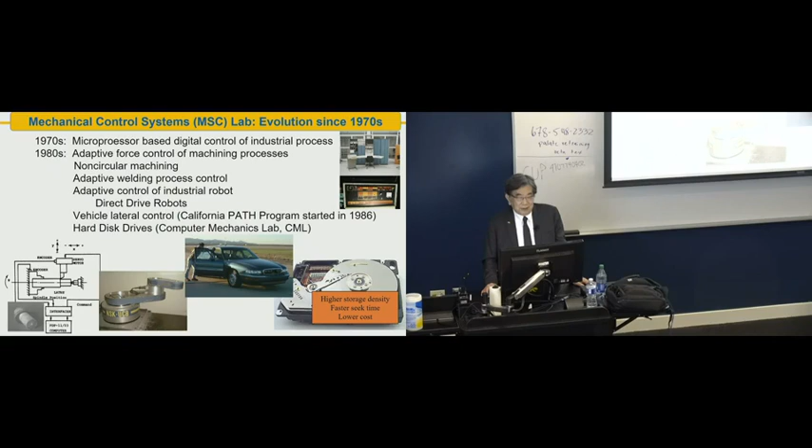And maybe it's nice to talk about what happened. This is my lab in the 1970s. We had some old minicomputers, and at the beginning I had a robot and a hard disk drive. Also in the 1980s, California was interested in automated highway systems. So I joined that group, taking care of so-called vehicle lateral control. So that's how I got involved in vehicle control.

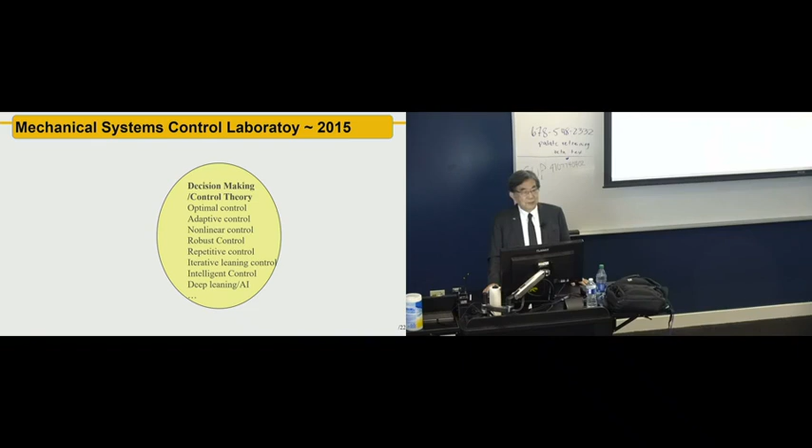Then by 2015, my home ground is always control methodology. Having control methodology in the center, I realize my lab is surrounded by all kinds of hardware, having all kinds of fun with students: machining, machine tools, robots, steering systems, and so forth. And so this is my lab now. I still have close to around 20 PhD students, half of them looking into intelligent industrial robots, and the other half looking into autonomous vehicles.

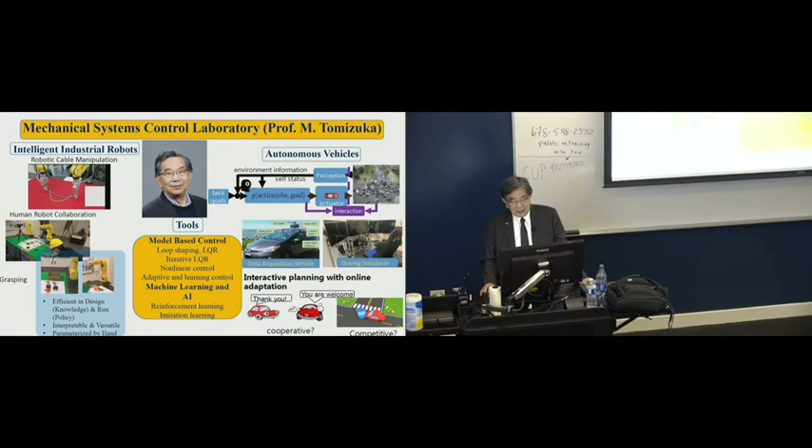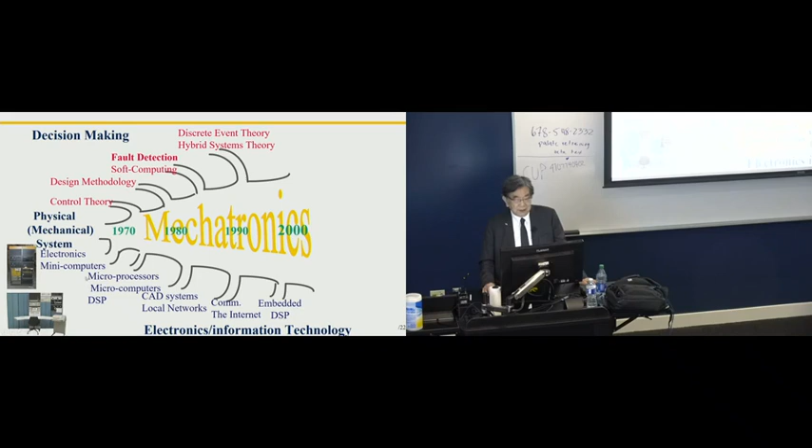As tools, we have all kinds of control methodology, but recently machine learning and AI have become a very important part. So I might call this a control-oriented mechatronics group. On the top we have the methodology part, decision-making, then electronics and information technology, and then physical systems. And now typically we deal with this kind of hardware. And this is the time axis: 1970, 1980, 1990.

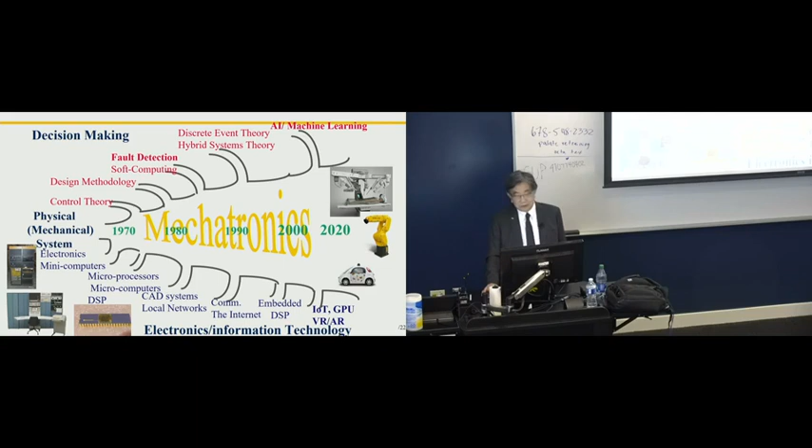But the most recent addition to the decision-making toolbox is AI and machine learning. And on the information technology side, all kinds of things: IoT, GPU computers, DPU, VR, AR, we are utilizing. So now we are there, and we have two pillars. One is intelligent industrial robots, and I will introduce some of them today. Human-robot collaboration is one interesting subject we have been doing for at least the last 5 years.

And then classic robot problems, but looked at from a newer methodology point of view. Impedance control, multi-agent interaction: it's not necessarily a new problem, but we can apply those techniques to new environments. Autonomous driving is an area where we can integrate model-based control and machine learning. So something called zero-shot deep reinforcement learning.

This is how you can make simulation-to-real gap filling. You train some reinforcement learning strategy by simulation, but when you apply it, the situation may not be exactly the same as in the training environment. So we would like to have the gap nicely overcome. So that's zero-shot, essentially, implementation.

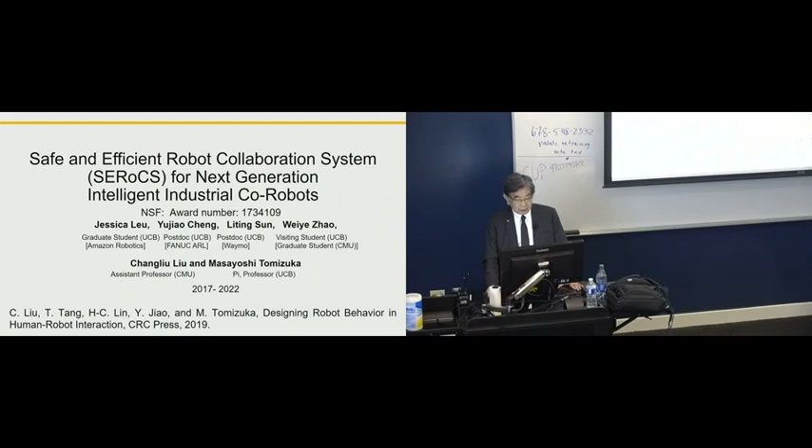The first project is safe and efficient robot collaboration systems for next generation intelligent industrial co-robots. This project was sponsored by NSF, and many people graduated. One key person was Changliu Liu. She is now an assistant professor at CMU. Some of the things we have done in this project are in the book we published, Designing Robot Behavior in Human-Robot Interaction.

And for human-robot collaboration there are lots of reasons. Manufacturing moved from mass production to flexible automation. Instead of producing the same kind of product, we produce many kinds of product. So flexibility is really important. Intelligence is important. So there are lots of opportunities for control and AI people to do something interesting. One of them is the co-robot, how you can make robot and human collaborate. Robots used to be just for mass production, but as we move to flexible automation, we would like to see more interaction of human and robot jointly accomplishing tasks.

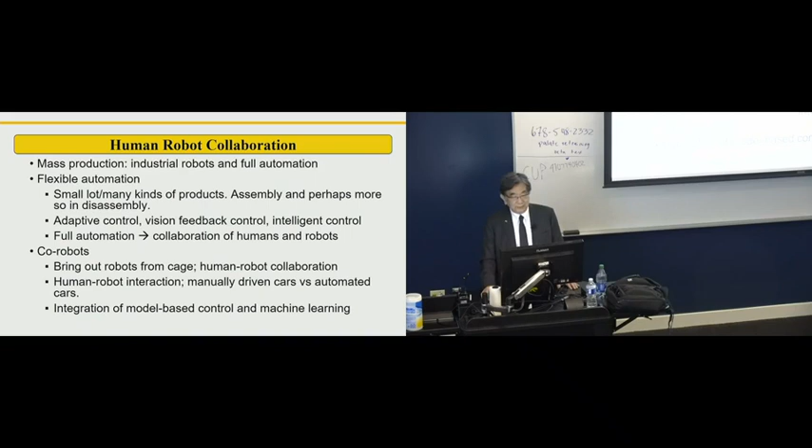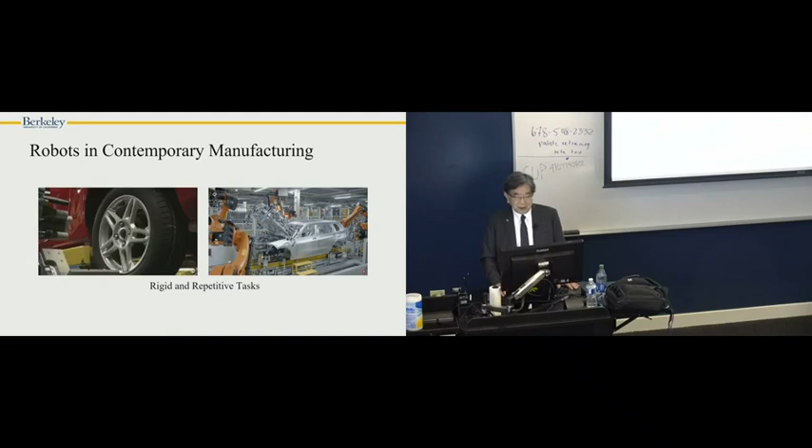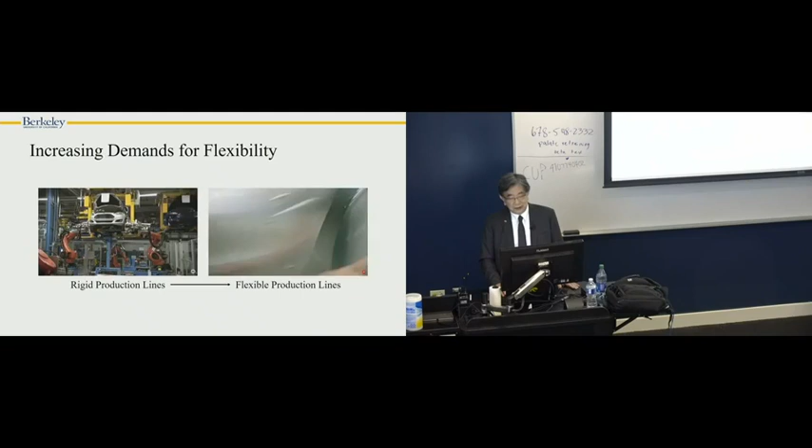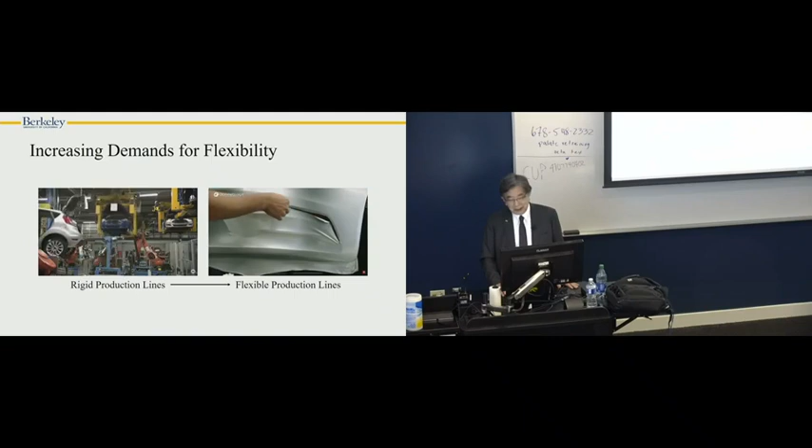So this is the more traditional way of utilizing robots, for rigid and repetitive tasks. It's for mass production. But in a flexible production line, for each car, you might need to put on a different tire. There, a human can do a very great job. The human is still the most intelligent and versatile machine. But humans can easily get tired. Robots can work 24/7, so we can take advantage of those aspects.

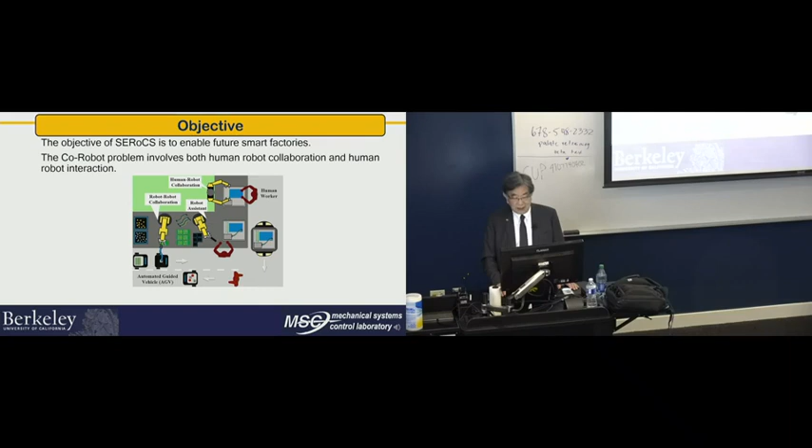So one way to envision the future factory is there are all kinds of human and robot interactions. In some parts they are working at the same station, but in other parts, human and robot are making one line and doing different things. So both human and robot work together. In designing nice human-robot systems, we would like to emphasize both efficiency and safety. Having a robot very close to people, we have to be very careful. And in achieving the design objective of production efficiency while doing lots of things in real time, we need to make sure that computation does not become a barrier.

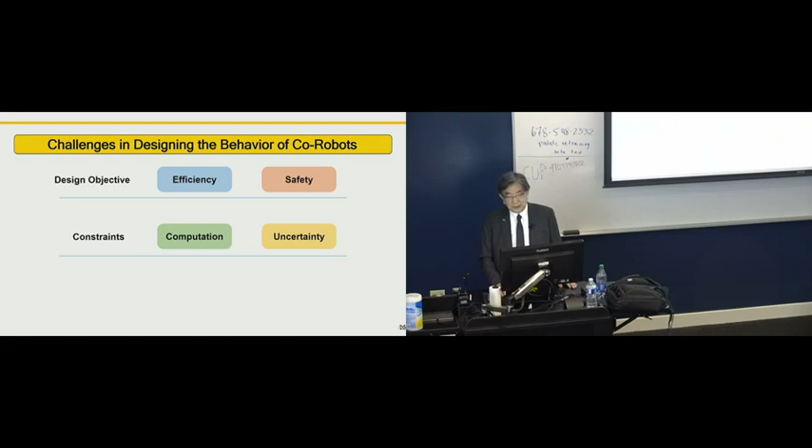And humans have lots of uncertainties. The robot has to be careful. If a human makes some motion which the robot didn't think about, that has to be quickly recognized and taken care of. So the question is how to design the behavior of a co-robot in a dynamic uncertain environment, with varying human dynamics and limited computational capacity. So that was the challenge.

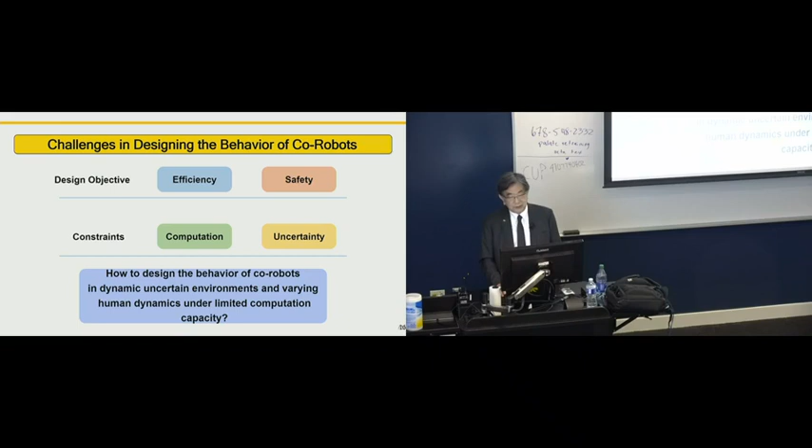To answer that question, one system that we introduced was so-called SEROCS, Safe and Efficient Robot Collaboration Systems. It essentially has 3 modules. One module is environmental monitoring. A big part of environmental monitoring is watching what the human may be doing. You might call this a social perception module. And once you have perception, how the other one will be making further motion, you have to predict. Prediction has to come.

Once prediction has come, first it has to be transferred to planning. What kind of plan should be made? To make good planning, we need a task module which is dedicated to task planning. In here we have a motion skill library and we do online task planning. Just in assembly, what kind of sequence we should follow is a good question. Once we figure that out, we do real-time operation: safe and efficient motion planning and control. And of course, this box is a place where people like myself, trained in control, can do some interesting job.

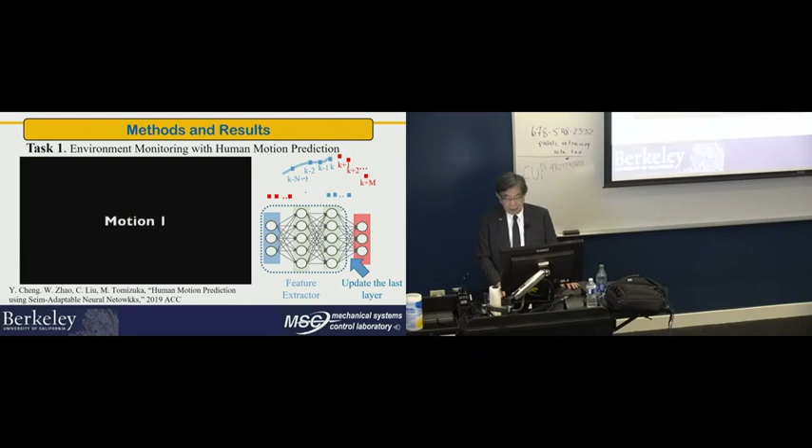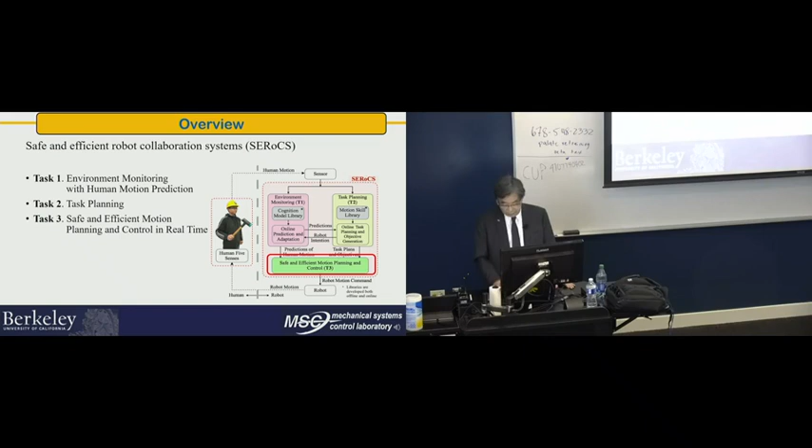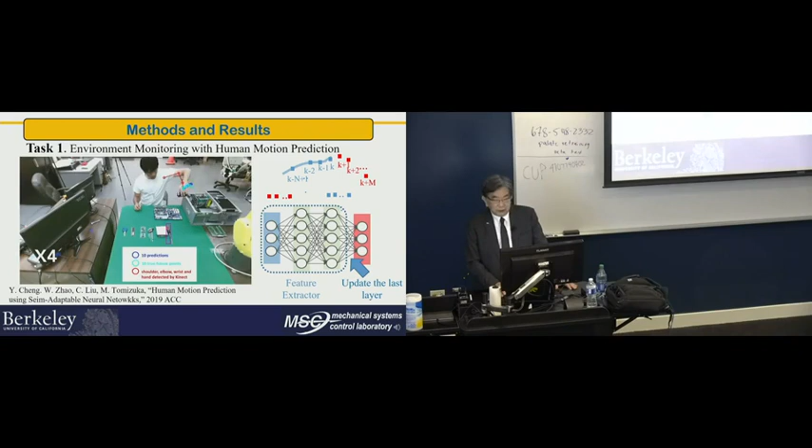That will result in the robot actually moving around, and the moving robot will be interacting with the human, and then make a feedback loop. Sensors again measure what the human is doing. So this is human motion prediction, perception and prediction. What is shown here is we are essentially making a history of the last N points, and based on that, predicting what kind of motion the human will follow.

Essentially, we made a neural network, and in some part of the neural network, we introduced an adaptive feature. The adaptive feature is for different humans. We do training for one subject, one worker, but a different worker may be coming. In that case, some adjustment of the network output will be useful. So this is task 1, environmental monitoring with human motion prediction.

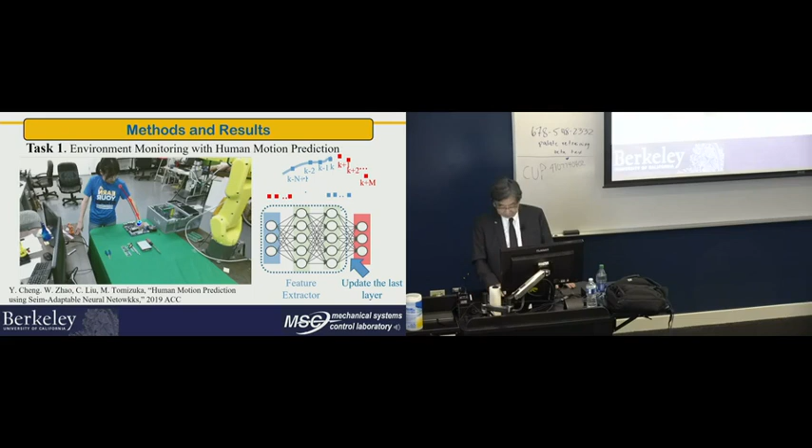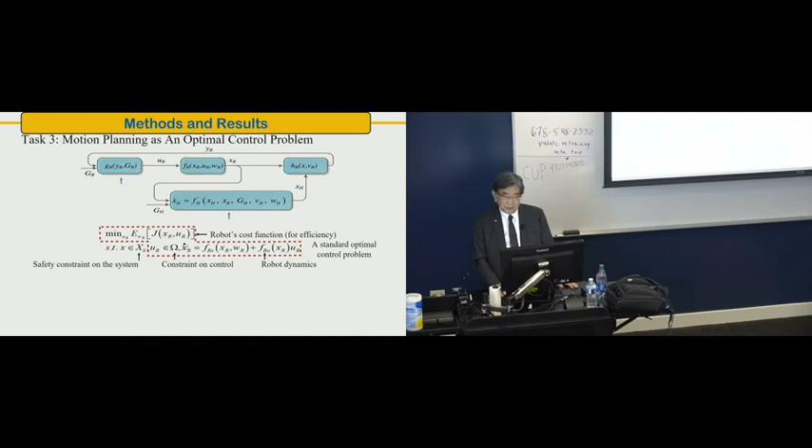And among those constraints, the most difficult one is the safety constraint on the system, because the human has got lots of uncertain aspects from the robot point of view. So if we just look at this dotted line portion, excluding the human, then the problem becomes a standard optimal control problem. So what we said was, okay, let's solve this part, the red part, utilizing some standard programming approach. But just applying the standard method didn't quite work, because the constraints include lots of non-convex optimization area, obstacles at many places.

So once we have this kind of feasible set algorithm figure out what is the optimal path, when the robot is actually moving, the robot has to make sure that safety is assured with dynamic objects. So in this case, this figure explains human and robot. The human is a sort of dynamic object, a dynamic obstacle, and we are doing robot control. And if, relatively speaking, human and robot stay in the blue area, we know that it's safe. Collision will not take place.

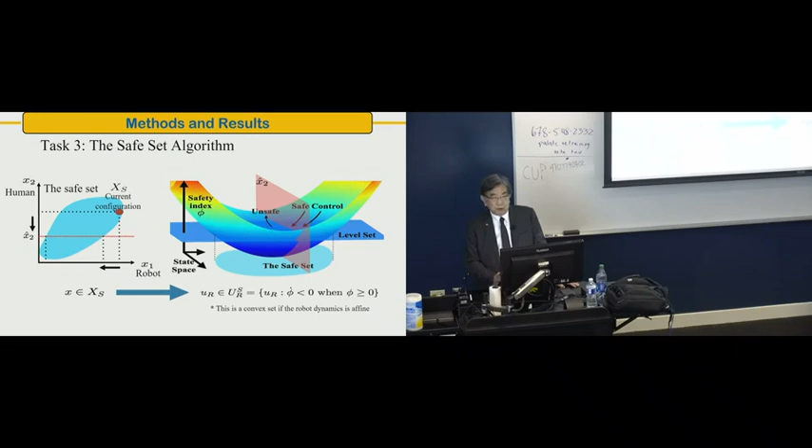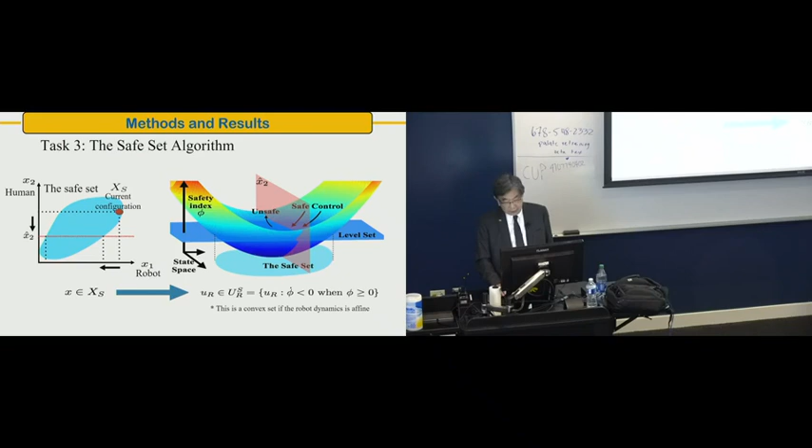So from measurement, if we regard that the safety index is positive, we would like to make sure that we define u such that phi dot becomes negative. So it will push back to the safe region. So this was called the safe set. This was also devised by Changliu, and it's the safe set algorithm. So the idea is that the convex feasible set algorithm will figure out what will be the optimum u, the best u. And then when safety is considered, we add a safety controller.

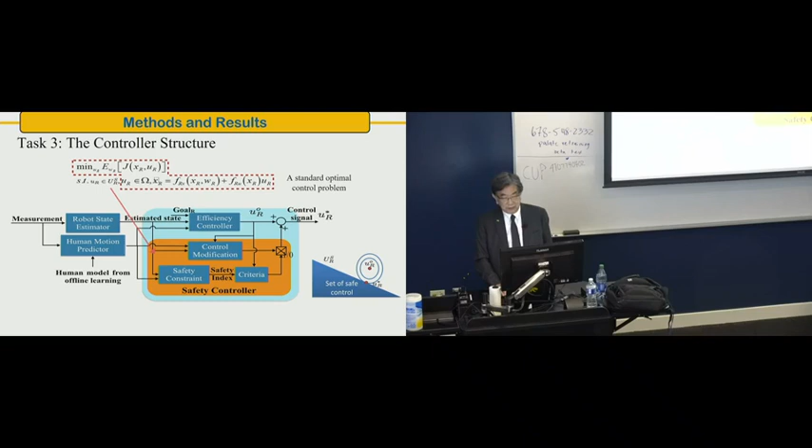And the idea of the safety controller is, if u is outside in the unsafe area, we try to pick the safe control from the safe set which is closest to the optimum UR. And in that way, we can achieve very safe maneuvers.

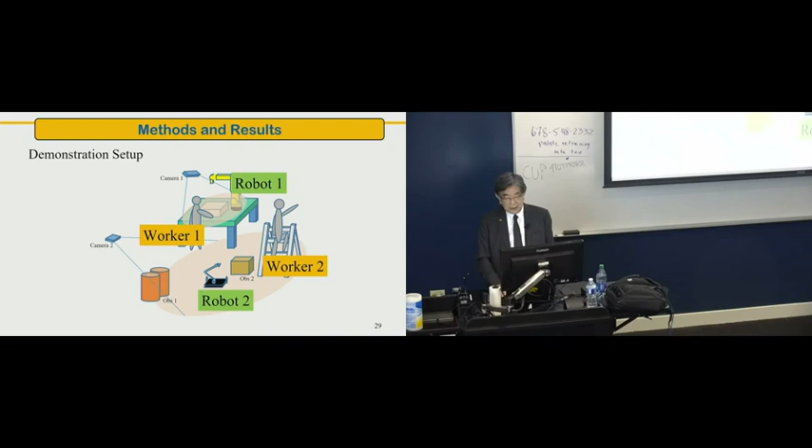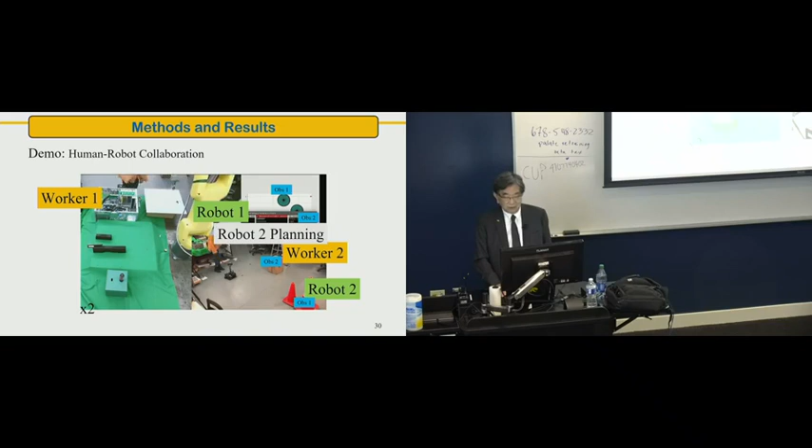We demonstrated all the ideas by making a simple setup. So this was the last part of the NSF project. We had 2 workers and 2 robots; at station 1 the robot and worker are assembling something collaboratively, and robot 2 is carrying one piece of an object from one worker to another without collision. So this was the last part of the NSF project.

Now, along this line, Changliu, after moving to CMU, continues. So this is conditional behavior prediction, what she is doing. And the idea here is when the robot does things, it observes what the human may be doing and decides its motion. But the truth is, if the robot does something, the human will react. So take that kind of reaction into account, account for the influence on the human, and make sure that everything is safe. She has a paper at ICRA this year. ICRA is, I think, in May in Yokohama. So she will be presenting this work.

In terms of flexible automation, many kinds of small amounts of product.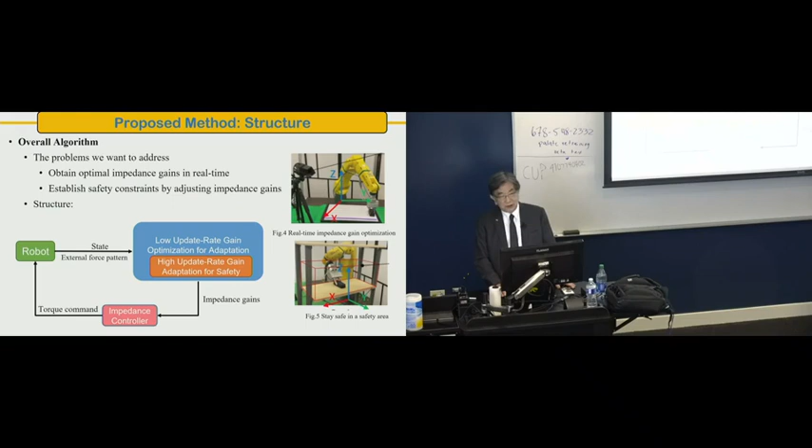So the problem they wanted to address is: obtain the optimal impedance gain in real time and establish a safety constraint. This is the kind of structure they came up with: a low update rate for optimization, and for safety, since an unsafe situation can arise at any time, the safety consideration has to be accomplished at a very high frequency—so a high update rate for gain adaptation for safety.

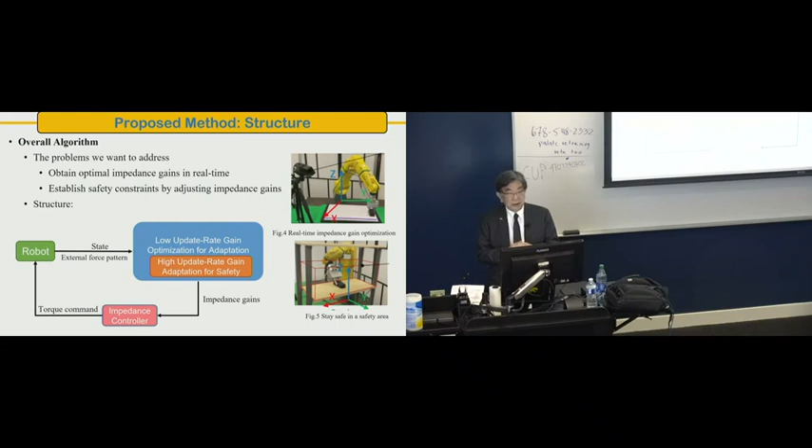By the way, this type of consideration is also common in autonomous driving. We have a layered approach: to deal with safety we have high frequency model predictive control, but for planning we have low frequency predictive control, and so forth. So the first step is to introduce a mathematical model for optimization of the gain, starting with the standard impedance control equation.

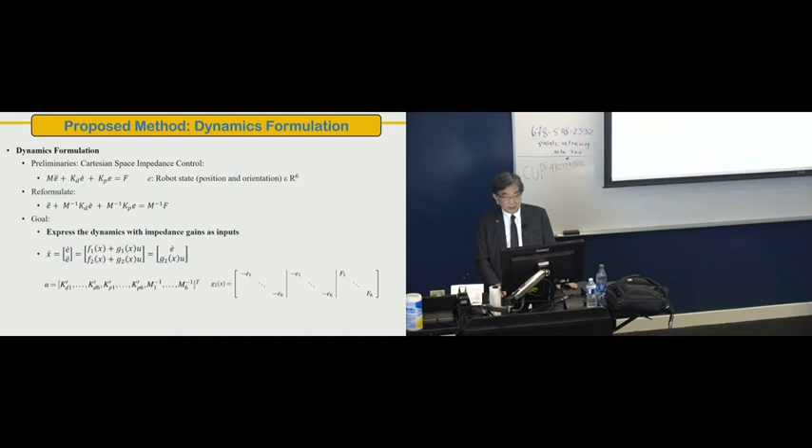The equation was rewritten. E-dot is still the state variable, but we put it as G2 times X times U, where U is the impedance gain, and G2 depends on the state. So instead of trying to keep the system linear, we put the equation in this form. The good thing is that U, the impedance gain, appears as part of the input vector, so it becomes more possible to do real-time optimization.

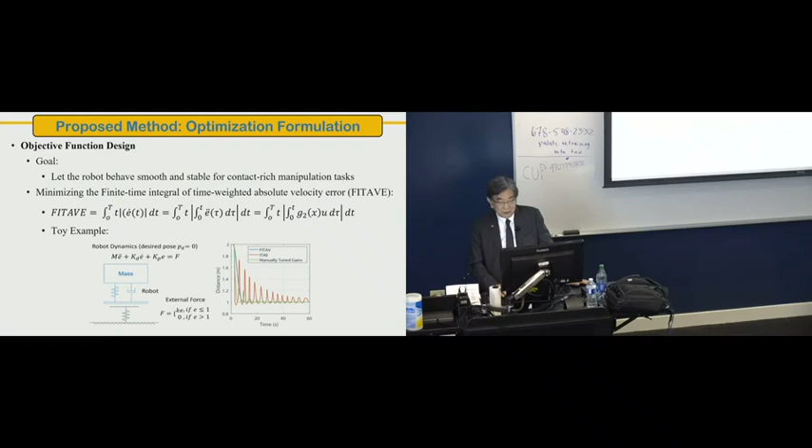To deal with the constraint, we use the so-called barrier function, a very popular approach for this type of problem. If h(x) is greater than 0, the first condition is satisfied—it's safe. But h(x) greater than 0 does not involve any control signal u, so we have to somehow introduce u. There's a theorem that makes h-dot(x) plus alpha times h greater than or equal to 0, ensuring h(x) stays greater than 0. If u shows up, you can make u satisfy this inequality constraint. If u still doesn't show up, you go through the same process again, and it results in a strategy to select u. We did this, and the performance looks good.

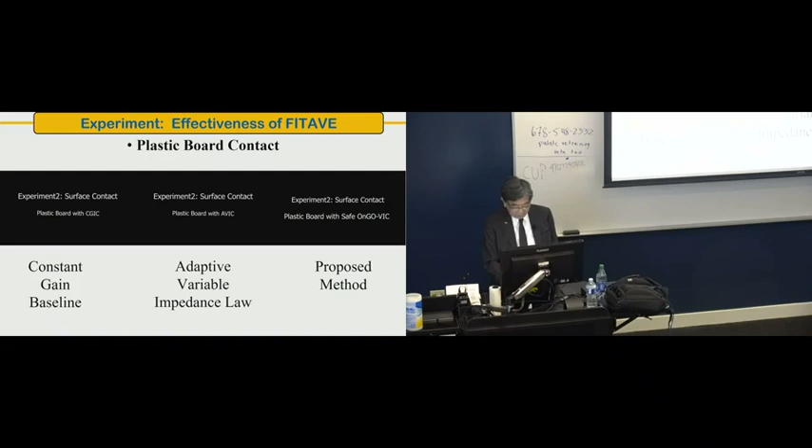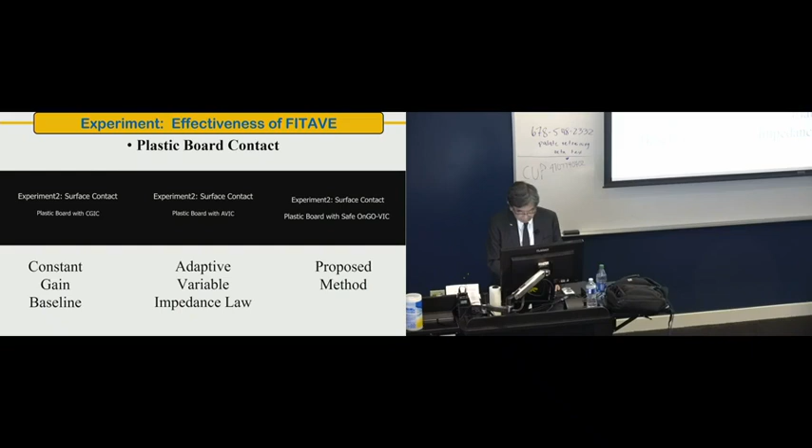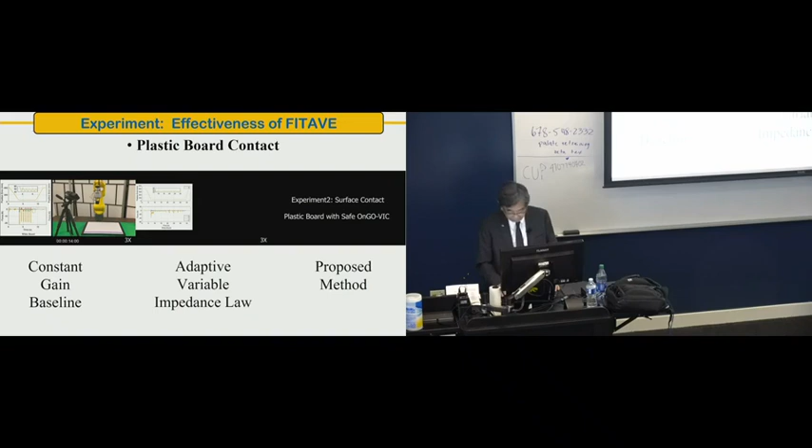Adaptive is good, but this method can make really nice and smooth transfer. I think I have to quickly move.

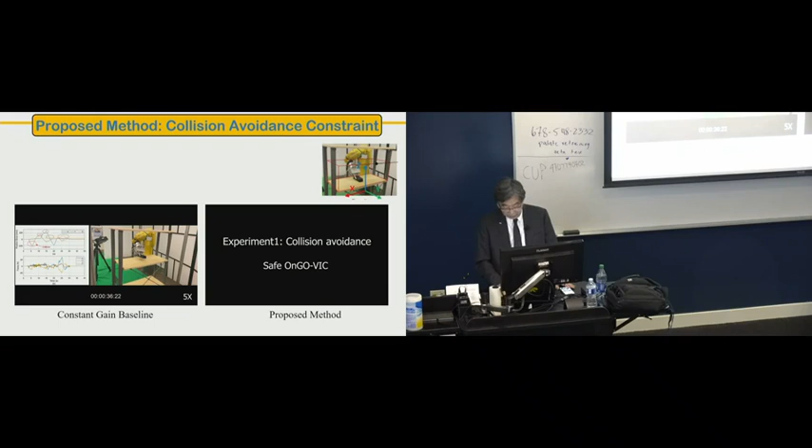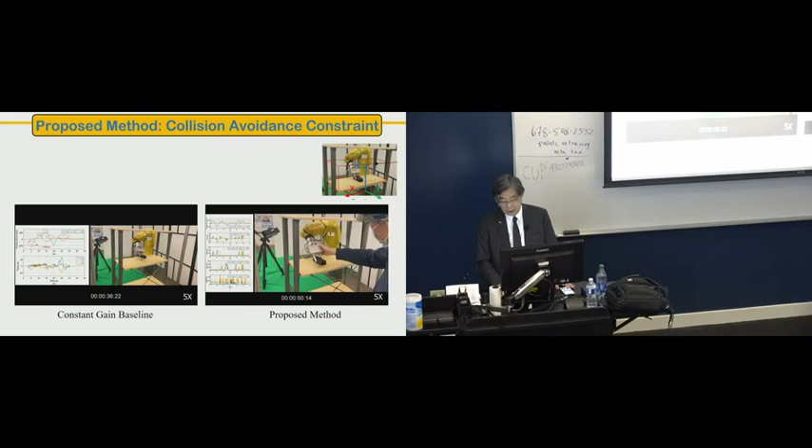Collision avoidance was also incorporated. Without collision avoidance, the robot can be easily pushed out of the boundary. But with the methods we just developed, as we come close to the edge, impedance is increased, so the robot resists that motion, the external force to go outside. So this was achieved.

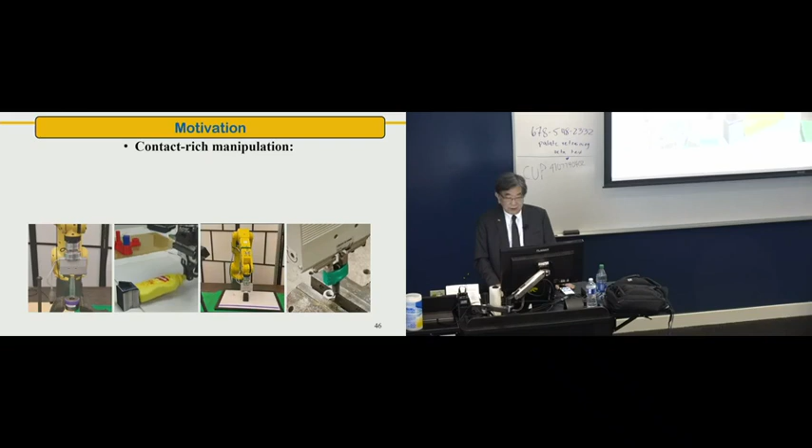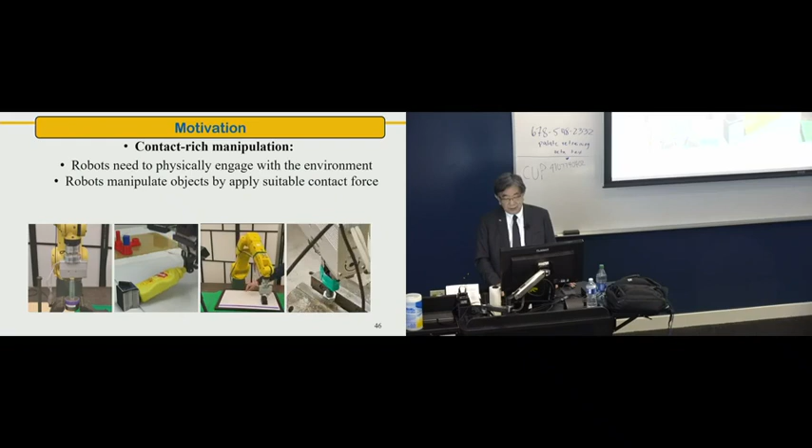Contact-rich manipulation is something the robot needs, physically engaging with the environment. The robot manipulates objects by applying suitable contact force. The traditional method is a human expert programming the robot. So here we wanted to do a learning-based approach.

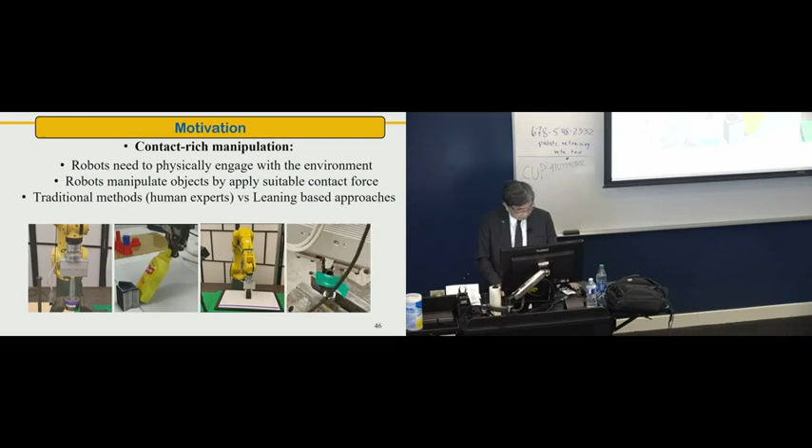To make a long story short, students succeeded in making a nice learning-based approach. It consists of an offline learning phase, where they do training by simulation-based learning. Then online, they further tune that policy based on sensor information.

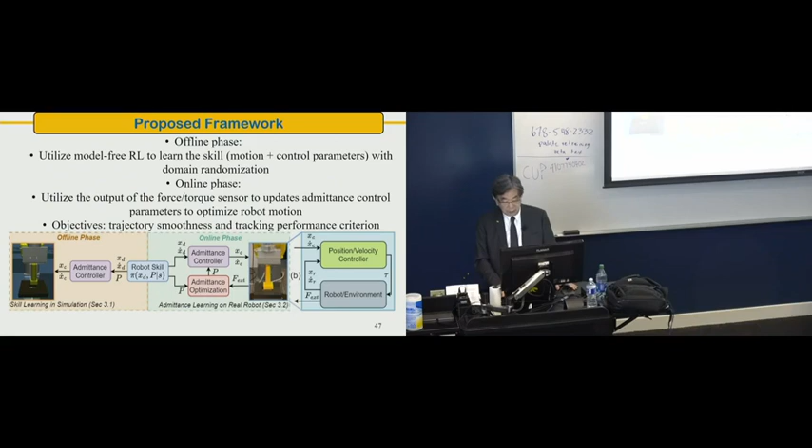And as a result, the proposed method, shown in the center, handles peg insertion. Of course, it does a good job for the trained scenario, but it also does a good job for some different tasks.

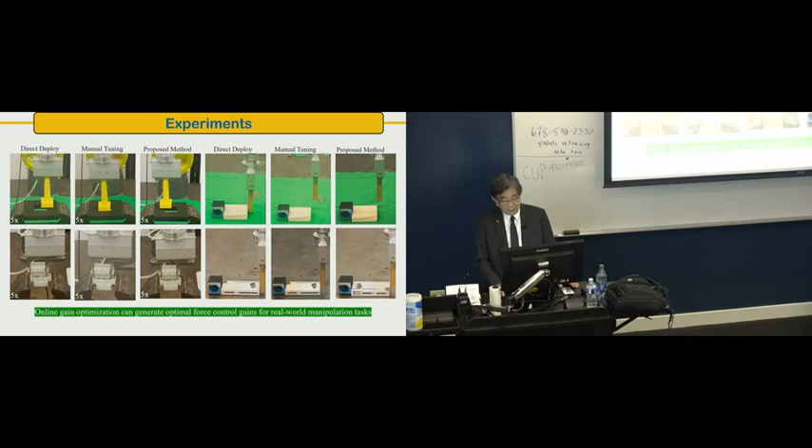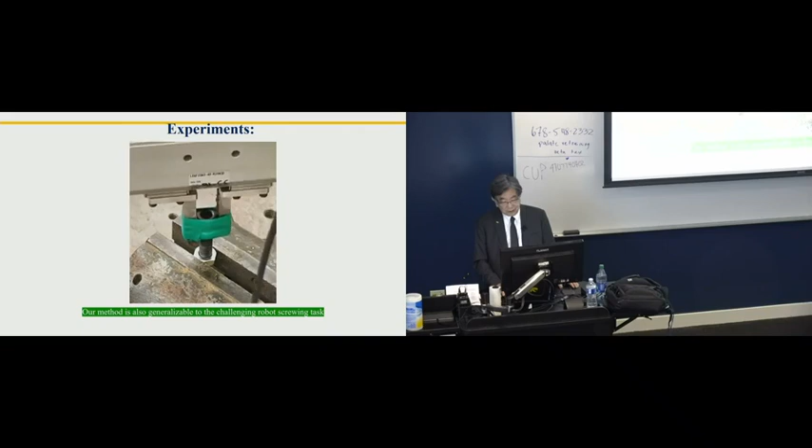Yes, and it even achieved something like handling a screwdriving situation.

Okay, I think I will skip this.

Multi-agent interaction generation with imagined potential games. This is how we may solve conflict resolution when two agents are coming close to each other instead of bumping. Someone has to yield, so that kind of collision will never take place.

This is a fairly new paper and it will be presented in June at ACC. If you are interested, go to the ACC proceedings and take a look.

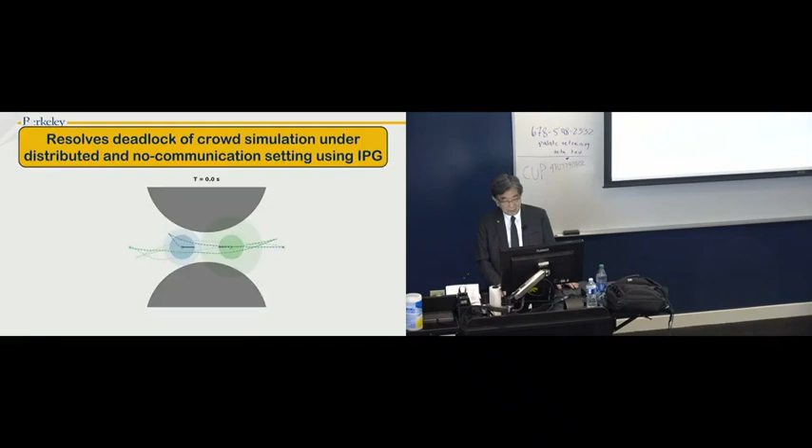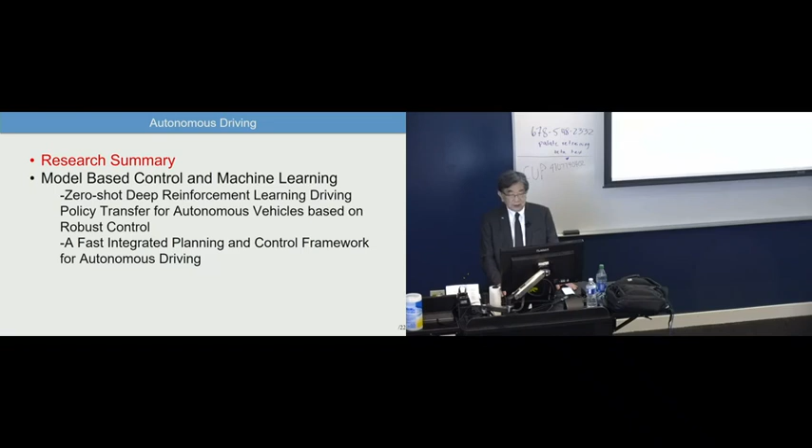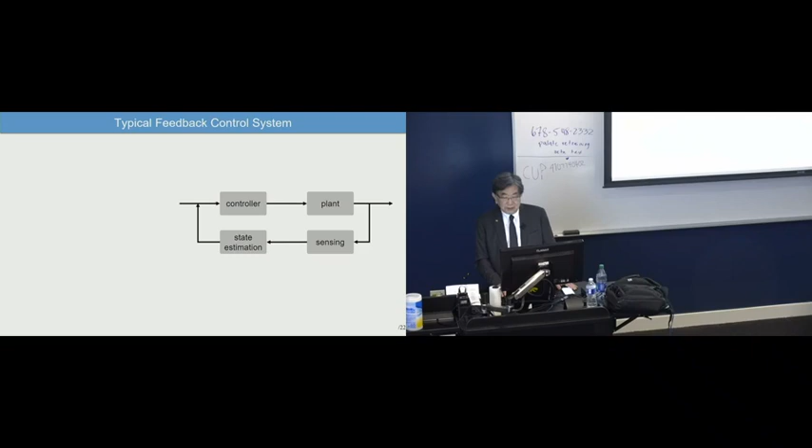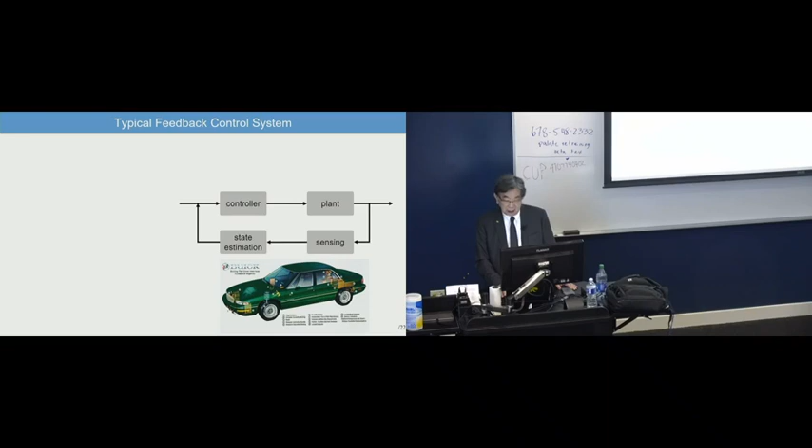Now, on the autonomous driving side, we have been doing model-based control and machine learning, their combination. For example, in this problem, something element involved around the vehicle, we would like to do some sensing, estimation, and control. This is a type of problem from when I was doing automated highway systems around 1990. Around that time we were doing this kind of research.

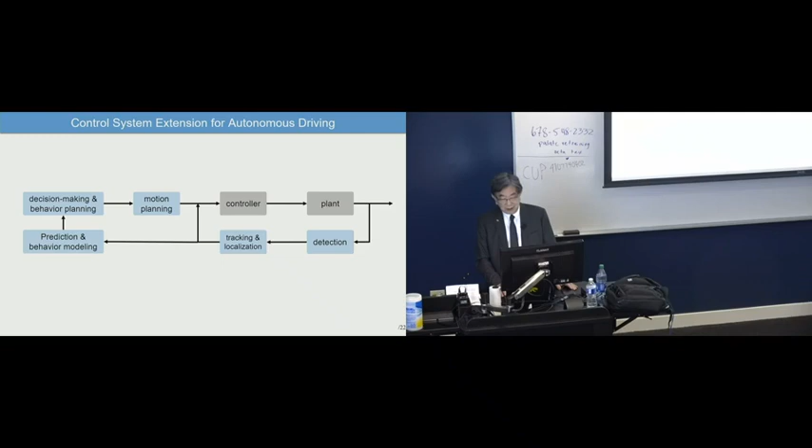But modern autonomous driving comes with perception, prediction, motion planning, and sensing - more generally a detection problem, and tracking, localization, perception, map information. So it's a very holistic problem involving almost everything.

Perception means we have to recognize where we are, what kind of obstacles we might have. Prediction is how the other car may be making motion. And according to the prediction, we have to make motion planning. On the infrastructure side, we have to think about HD maps, data pipeline, simulation testing. So all kinds of elements are in autonomous driving research.

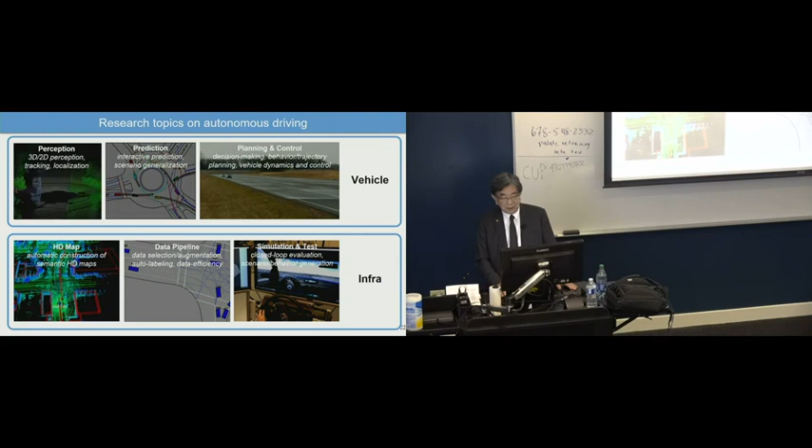So we have a test vehicle developed for the lab and a simulation tool. It's not really the most professional compared to some automotive companies - they have better simulation tools, hardware in the loop, experimental setup - but we have made our own version.

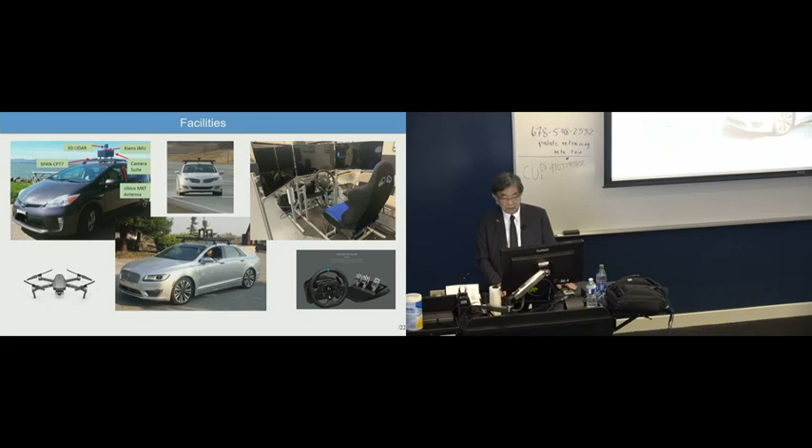One aspect is that we really looked into integration of model-based control and machine learning. Model-based control is still very traditional, so we know the robustness condition, stability condition. By having a model, we have mathematical foundation. Machine learning's idea is we just try to find the strategy based on lots of simulation learning. Some people say model-free, but it's not - that becomes a limitation also, and also it takes a long time to learn.

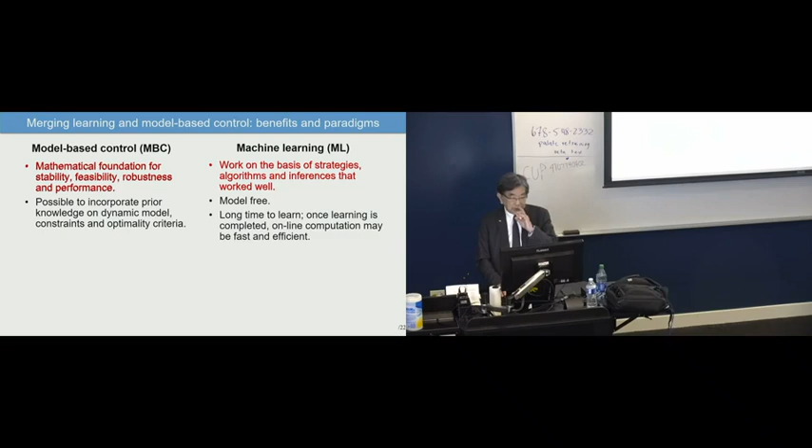So taking advantage of combining the good parts of model-based control and machine learning, we should be able to do some nice things. So we learn plans by machine learning and determine real-time control by model-based control. I think transfer learning may be possible by robust control theory, learning key parameters of the planner/controller.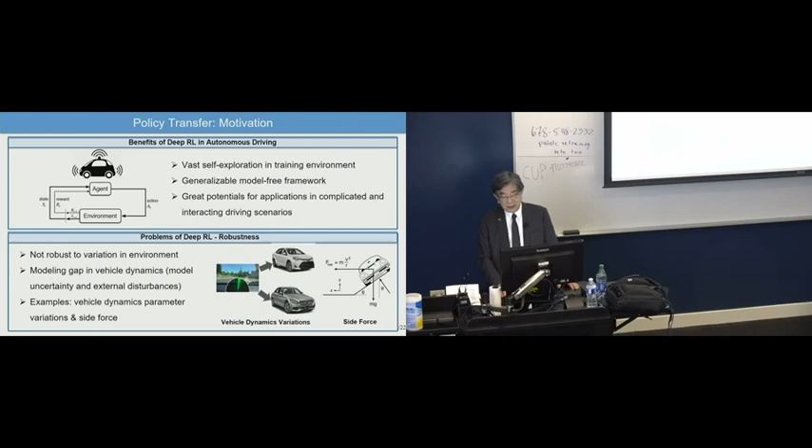But when you actually do a test, implementing on a real vehicle, the real situation may not be exactly the same as the training situation. There may be disturbances, the vehicle model is different, so the vehicle reacts a little differently to the input command, and also disturbance due to wind, some super elevation - that kind of thing affects the actual motion. So robustness guarantee is very important in real-time application.

We do a good job as a human driver if we take a license driving using one car, and that skill can be utilized for almost any kind of vehicle. When we rent a car, we try to rent some new model we never drove. We can do that, but I think we can do decent driving because we can easily know the good basic part and make adjustments to the difference. So we try to do this kind of thing by computer, automated systems.

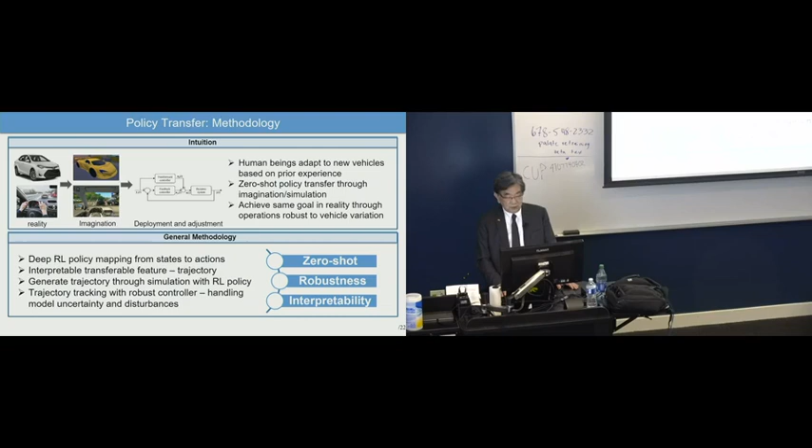Zero-shot robustness, interpretability - all can be achieved by some robust control method. So in block diagram sense, we explain that we have a source domain where the learning is done, and we have a target domain. Normally, in the test environment, the target domain shows up.

Now, if source domain learning was essentially from the observation of road shape to the pedal or steering angle - that kind of input - if we just learn that kind of thing, that's not good for robust control because it's too vehicle dependent. But if we learn, given the road, what will be the good reference trajectory to follow - it's not necessarily just going to the center line. When we do a lane change, what is the reference trajectory we should follow?

If we learn the reference trajectory, essentially robust control can come in to achieve following that reference trajectory under disturbances as well as variation of the dynamics of the vehicle.

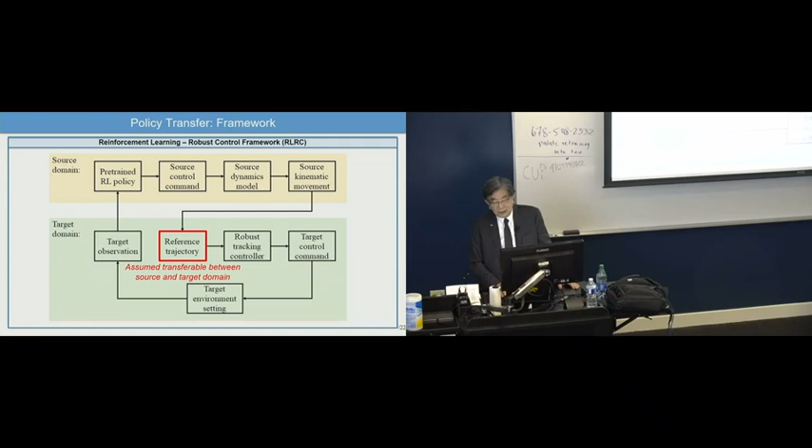So we devised this kind of approach, and here we plotted the effect of parameter variation, side force due to wind, and so forth. As disturbance increases, parameter variation increases. If we do not add a robust controller, performance keeps going down. That's the blue line. On the other hand, if we add some robust control methodology, we can attain fairly flat, same performance.

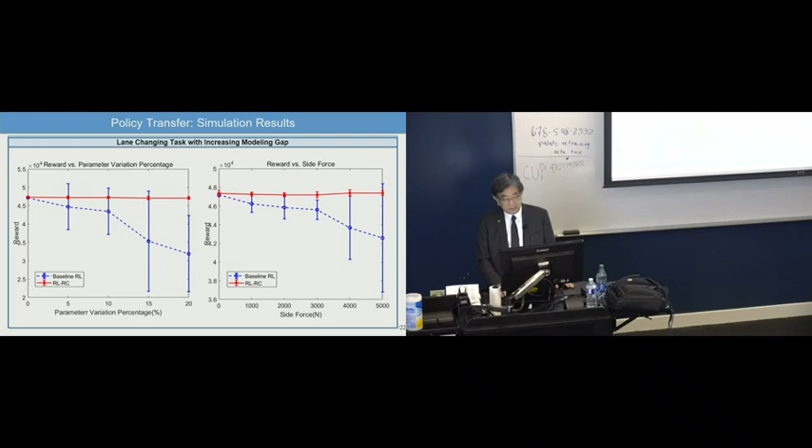We did some experiments in this case near the UC Berkeley campus. There is a test field where we can do this kind of experiment. And this is closely related to human-robot collaboration, planning, learning, and what to follow in action.

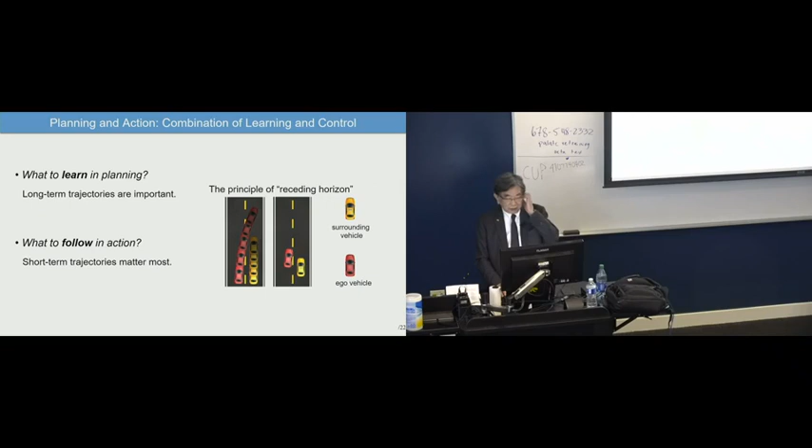Essentially we came up with the structure shown on the right-hand side, an integrated planning and control module. The policy layer sets the basic policy, what kind of trajectory or path we should follow. We used a neural network to develop the policy layer. And once the neural network is learned, it's itself very fast to implement, because it's just a nonlinear mapping.

So the nonlinear mapping gives some reference trajectory, but if some obstacle shows up, if the vehicle has to make a fine adjustment, the execution layer has short-term optimization, short-term model predictive control, for example, and makes a good decision. This is the neural network part. We did some imitation learning, the idea being: given some key variables, how they should be combined to give the best output waypoint, then execution.

Okay, so let me just finish. This is, for courtesy, something else we are doing: the AI race, pushing the limit. It's kind of interesting, it's a game environment, but there are lots of interesting research challenges.

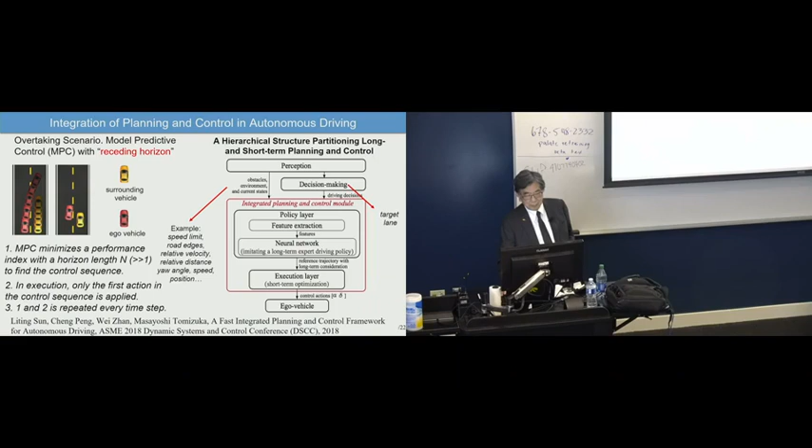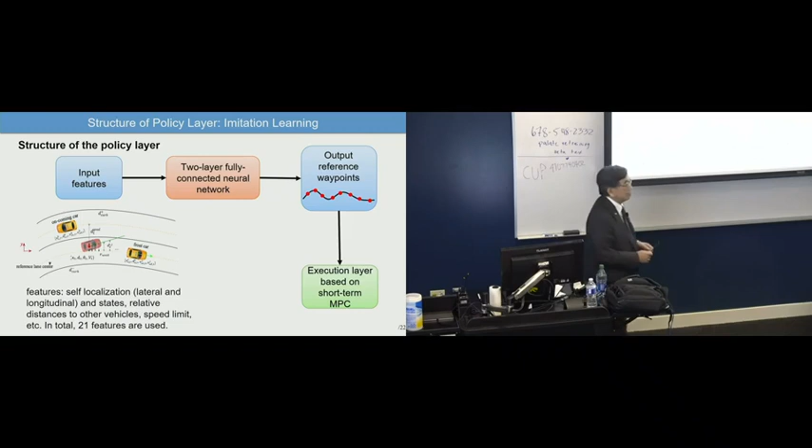These are the features, the input. Then what if for a certain input you get a really bad trajectory from the neural network because these statistical inputs were never trained on? Yeah, given, so actually once it's trained, these become inputs to the network, and it will generate and follow this trajectory. Hey, be quiet in the back of the room as you leave, please.

Okay, cool. I think we published a paper, so if you're interested, it would be nice if you could take a look at the paper. Okay, cool. Yes, sir.

So, follow up on his question. I think maybe what he's getting at, I'm not certain, is: if the inputs somehow lead to a bad output, what role does this MPC play in ensuring that, at the very least, if there's a bad waypoint output, you can still achieve some form of safety?

Actually, if the reference waypoint does not exist, and if we jump straight into the model predictive control itself and try to implement its nonlinearity, etc., it's very computer intensive, so you can only go for a short time horizon. Then that's not good, because with a short time horizon, it may even crash immediately.